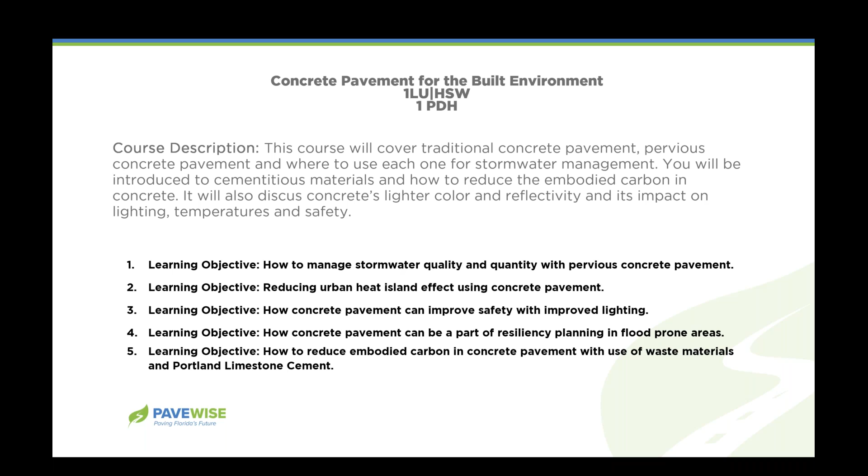We're going to be talking about managing stormwater, both quality and quantity, reducing urban heat islands. We're going to be talking about safety in lighting and how pavements play a role. We're going to be talking about resiliency and specifically how flooding impacts pavements. And then we're going to talk about reducing embodied carbon in concrete pavements. So it's a lot of different topics today, and we're tying them all into how concrete pavement affects people and planet when we're talking about the built environment.

So let's get started with managing stormwater. And in case my video doesn't work, I have a photo on here as well. But I think the easiest way to start talking about pervious concrete is to see a little video and watch how quickly the water can pass through this pavement.

I'm not sure if you can hear me while the video is running, and we'll just let this run for just a minute so you can see what's going on. Yes, Amy, yes, we can hear you. Okay, good. So this is coming out of the back of a ready-mix truck. That is a lot of water just disappearing into that pavement. So we're going to be talking about managing quantity and quality of stormwater.

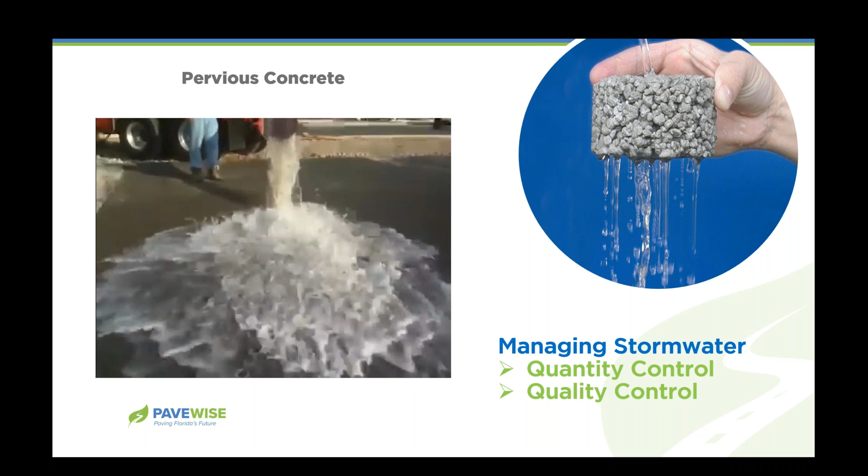Okay, so now you get the picture. It's a little easier to talk about what is pervious concrete. It is a no-fines concrete. It has about a 20% void space. It's missing the sand in the mix. So you just have your aggregates and your cement paste that are locking it together.

Depending on the mix and how it's placed, you can take 300 to 1,000 inches per hour. And in a heavy afternoon rainstorm, you're getting maybe an inch or two an hour. So really, the pavement layer is not your limiting factor. People are always worried about it getting clogged, but the pavement itself is really only part of the picture.

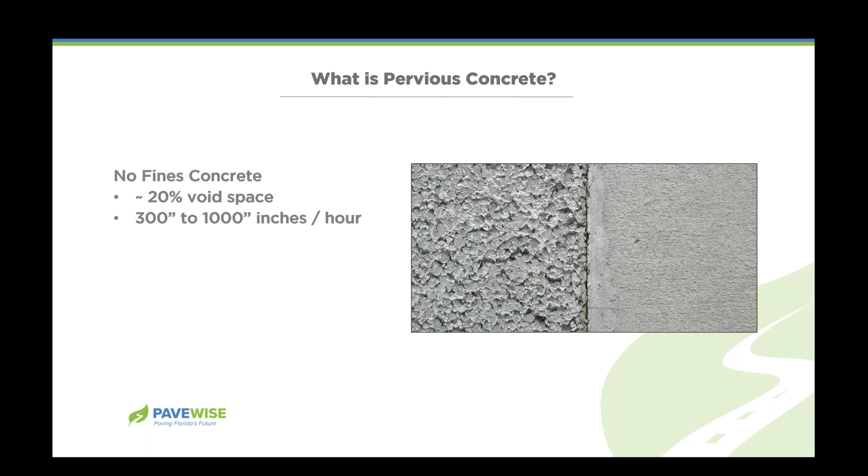Here you can see what it looks like, the texture - the traditional concrete on the right with a solid finish, and then the pervious concrete looking something like a Rice Krispie treat.

So it's one way that we can reduce the impacts of development. Here you see pre-development, where water can infiltrate through the soil and through grass, through the plants. And then when we develop a piece of property, we are really cutting off the way that water is getting back into the ground. So pervious concrete is one way that can really help us reduce the impacts of development.

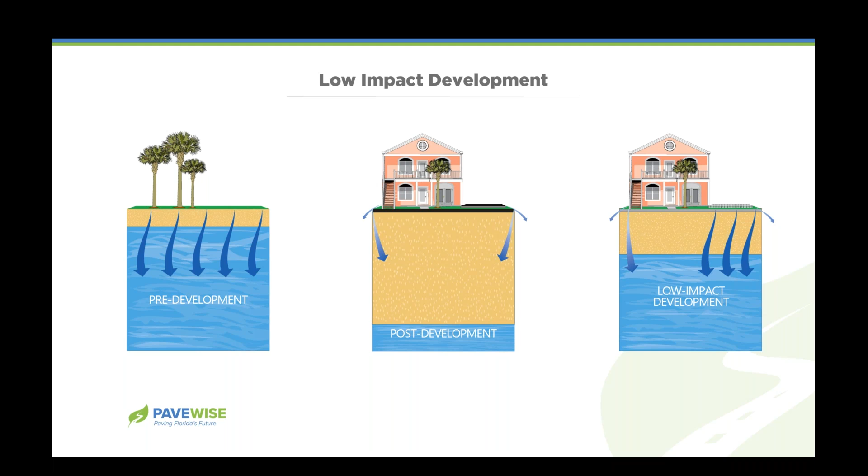And as we saw, the pervious concrete pavement layer, the water can go directly through that really fast, but it has to go somewhere. So what we need to understand is that pervious concrete is not just a pavement, but a stormwater management system. It's important to have an aggregate reservoir underneath the pervious concrete to hold that water and to give it time to infiltrate down into the ground.

A geotextile fabric layer goes between the soil and the aggregate reservoir to keep the soil from migrating up in there and giving you less void space in the future. And as you can see here, you can mix that pervious concrete with asphalt, with concrete, with other types of pavement.

And you want to make sure that you're going to have a barrier in between the other types of pavement and also the soil, because you could have washout underneath because that water is moving through so quickly.

One other thing to keep in mind is, as the water's infiltrating down into the soil, it still has to go somewhere. This is important in certain parts of Florida where we have really high water tables. So we recommend that you have 24 inches between the base of your reservoir layer and the water table. This helps it function and lets the water get back down into the soil.

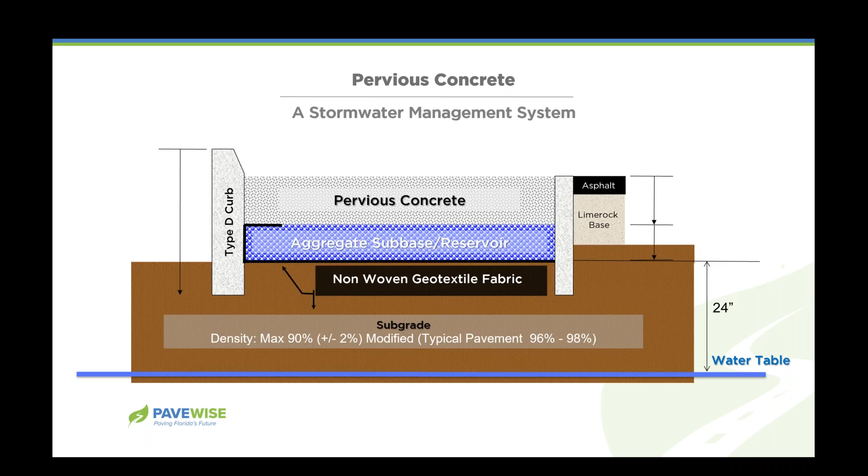So we can calculate it. The pervious, 6 inches of pervious concrete with 20% void space, you're going to have 1.2 inches of rainfall that can be held in that layer, and a 6-inch aggregate base with 40% void space is going to give you 2.4 inches, for a total capacity to hold 3.6 inches of rainfall.

Now we can extend that capacity by increasing the aggregate base layer. And then of course you have to calculate how quickly it will go into the soil. So we have some spreadsheets that can do this. It's really a pretty easy calculation.

So you can also add in rainfall that's coming into your pervious concrete from either traditional concrete or a roof area. So you can design your pervious concrete to store as much water as you need to for the conditions in that location.

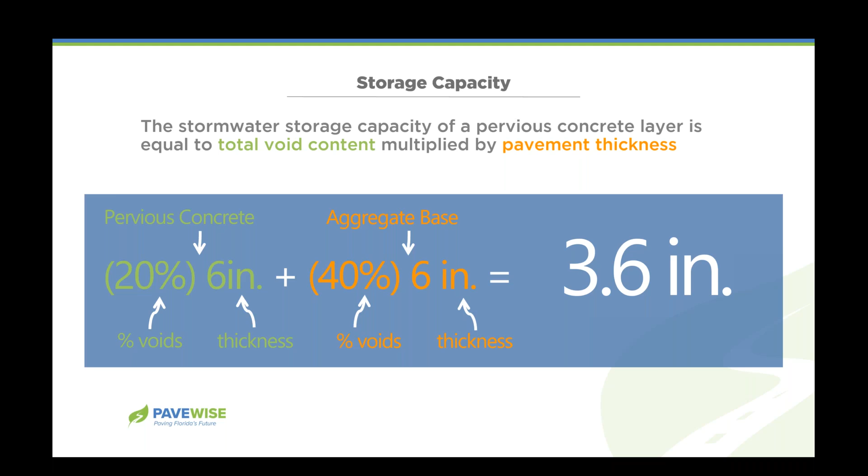Additionally, you can reuse the water in that reservoir to water landscaping. We don't see this a lot in Florida because we're not a water scarce region, but we do in other parts of the country. This is really important for them to be able to capture and reuse that water.

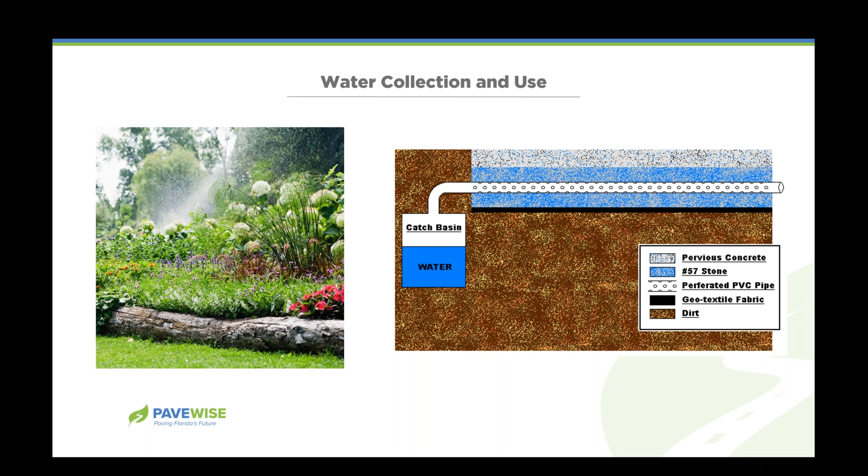So what is the effect on your vegetation? What's important here is not only is the water getting through to the vegetation in your landscaping, it's also air. Sometimes we see pavement that's been popped up by roots, and those roots have been suffocated and they're trying to get up and get air. So the pervious concrete is going to let water and air down into the roots and help your trees be healthy.

And also in a parking lot, you're able to pave within the drip line where you wouldn't be able to with an impervious surface.

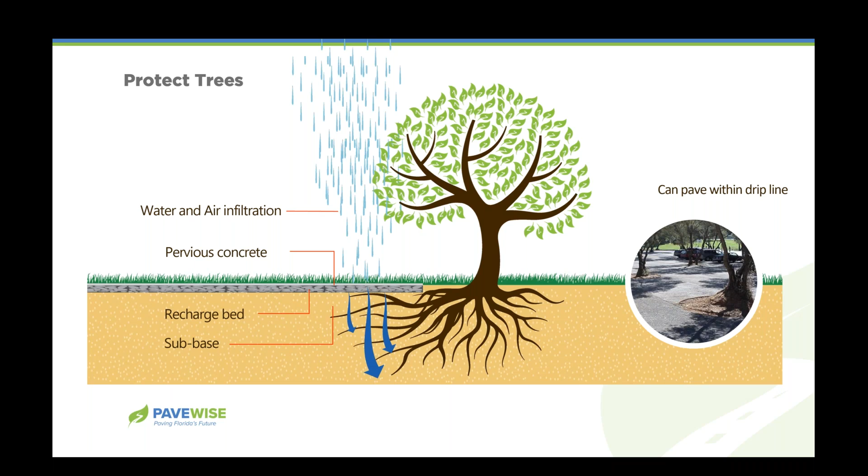Also, there's a requirement for that first inch of rainfall to be captured and cleaned, and pervious concrete does fulfill those requirements. It's a best management practice for capturing anything dripping out of your vehicle or anything that gets spilled on a pavement. It's cleaned in a couple of different ways: there's actually some algae or bacteria growth that happens in the void space, and that cleans the contaminants, as well as when it's getting into the soil, it gets broken down by the soil microbes.

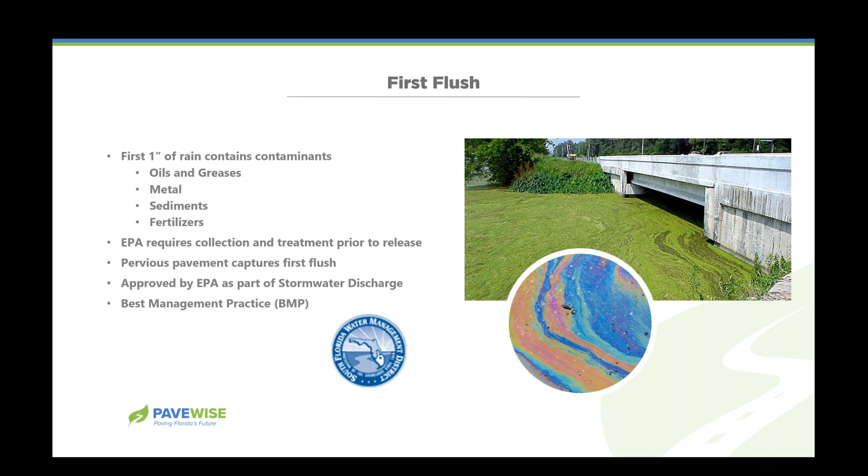So we've talked about recharging the groundwater, conserving our water resources, helping the vegetation that's surrounding our built environment, and cleaning the runoff. It's also a cooler surface, both due to the light color of the concrete, but also to the moisture that's in the pavement, and when that evaporates, it has a cooling effect. So there's a lot of environmental benefits when we're talking about pervious concrete.

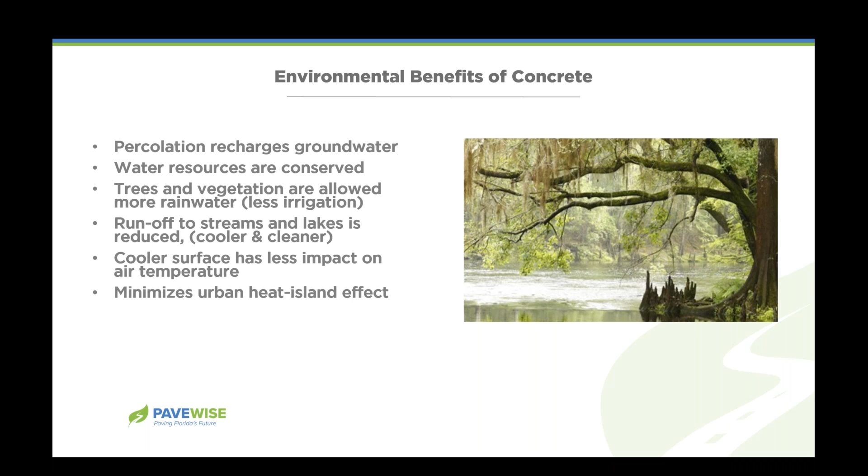However, there's also economic benefits. In places where land is cheap, we can buy more land and put in a retention pond. We know that locations with inexpensive land are getting fewer, and our land costs are going up. So why not put that retention pond underneath of our parking lots and have more space on the lot to develop? So land cost is important, and also you're eliminating the infrastructure that's channeling the water into the retention pond.

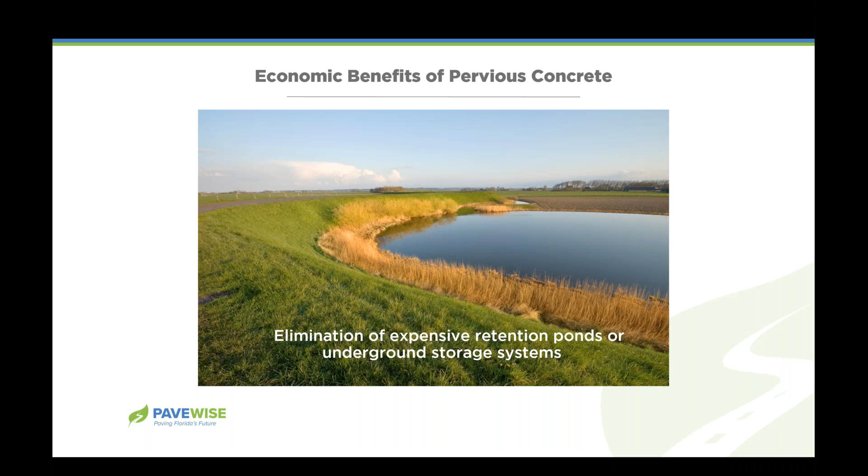So great, that's some cool stuff. Now, where do we use it? Again, parking lots are really the ideal place to put pervious concrete. But you can also put it in driveways, sidewalks, residential streets, and it's a great product for roadway base as well as shoulders of the roadway to keep the runoff from going into an adjacent stream.

Now, it isn't an application that you're going to use everywhere. It shouldn't be used for airports, runways, etc., basketball courts—we're going to talk about ball courts a little more—industrial facilities, gas stations, and again, areas with a high water table, you're going to lose the benefits of that water management.

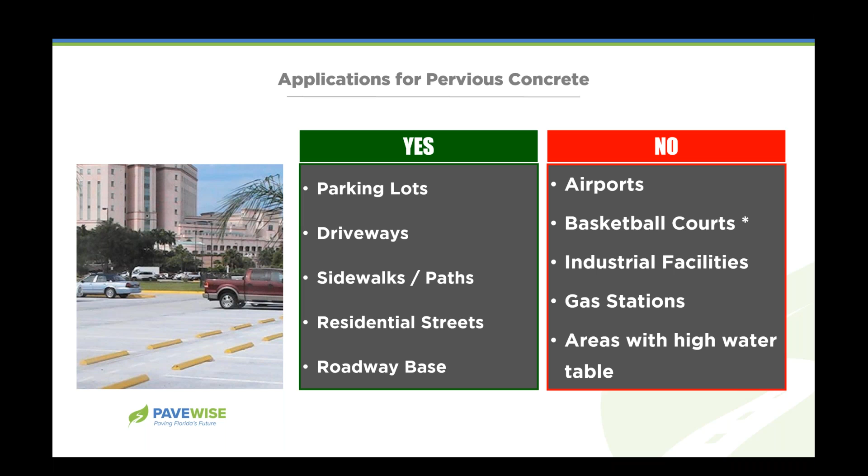I like this example of a parking lot, and here they have chosen to mix both traditional concrete and pervious concrete. They've designed it so that the reservoir is capturing the runoff from the impervious surface as well. You can also see that they have put in some swales that in an extreme event would capture the additional runoff. And as we just saw recently, we do have some extreme events with exceptional rainfall.

Driveways—we're building on smaller and smaller lots with bigger and bigger houses. There are some municipalities that are taxing impervious surfaces, or they're simply not allowed; you have to keep a certain percent of your property as pervious. So a pervious driveway can really help in some of those situations.

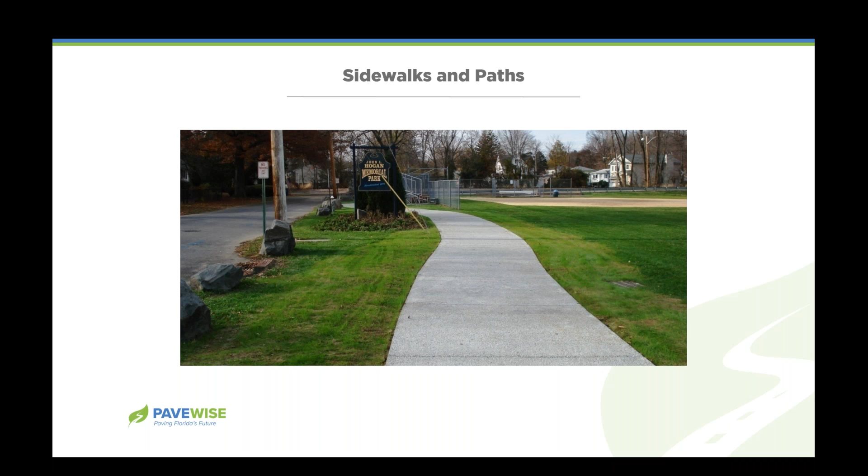Sidewalks—pervious concrete is ADA compliant, so you can use it in sidewalks. The smaller the aggregate that you use in the mix, the smoother the surface. So for an application such as a road base, you're probably going to want to use a larger aggregate because the drainage is most important, whereas for a sidewalk, you're going to want to use a smaller aggregate to have the smoothest surface possible.

Streets and alleyways, residential streets—there are a few developments where the homeowners really want to be as environmentally friendly as they possibly can, and this is one way to help reduce the impact of that new development.

Again, pervious concrete, while it is a robust material, does not have the same strength that you would need for an industrial facility, especially something like a port, where you could have vehicles even heavier than what you would find on the roadway. So this is not a product for an industrial facility.

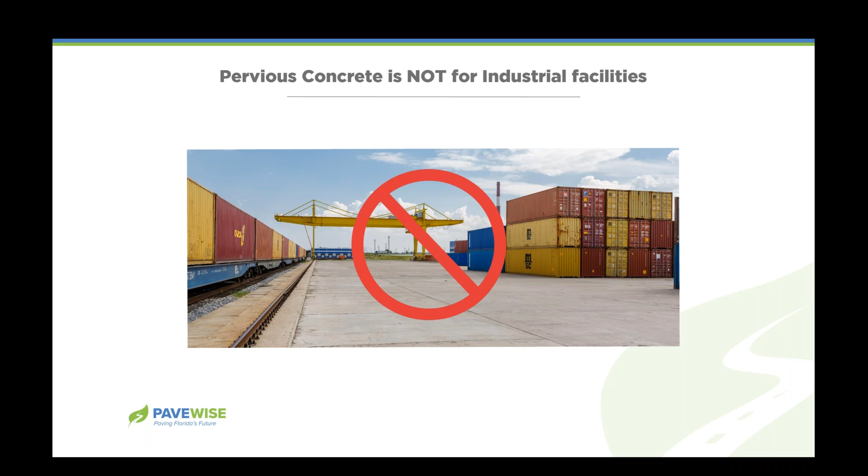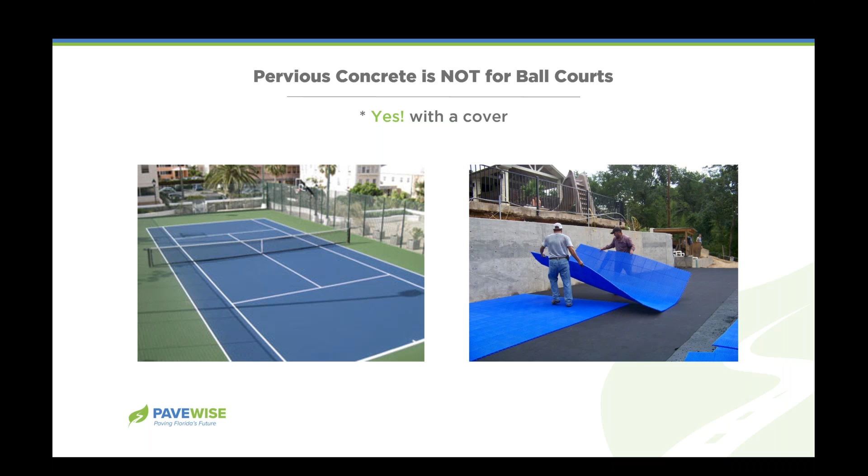Now, I have an asterisk here because concrete is not for ball courts, but they make a great base for a court. You've seen after a tennis match that has a downpour and they're out there squeegeeing off the court so they can complete the match. If you have pervious concrete as the base of your ball court, following our afternoon thunderstorms, you're able to get right back out there on a dry court, and they make some covers that go on top with nice colors and lines. I've seen a few of these projects recently, and people are really happy to have that dry ball court.

Okay, so we've talked about how to manage stormwater, both quantity and quality, and we're going to switch gears now to talk about safety.

What we know is that no one really likes to park out in the back dark corner of a parking lot and go into a store. Where do we park? We park underneath the light. The lighter color of concrete is reflective and will help distribute the light more broadly throughout the parking lot. This has been shown to not only reduce accidents, but also crime. There even was one study that showed an increase in shopping because people were more comfortable being there at night. I don't know about that, but we do know that it does improve the lighting in the parking lot.

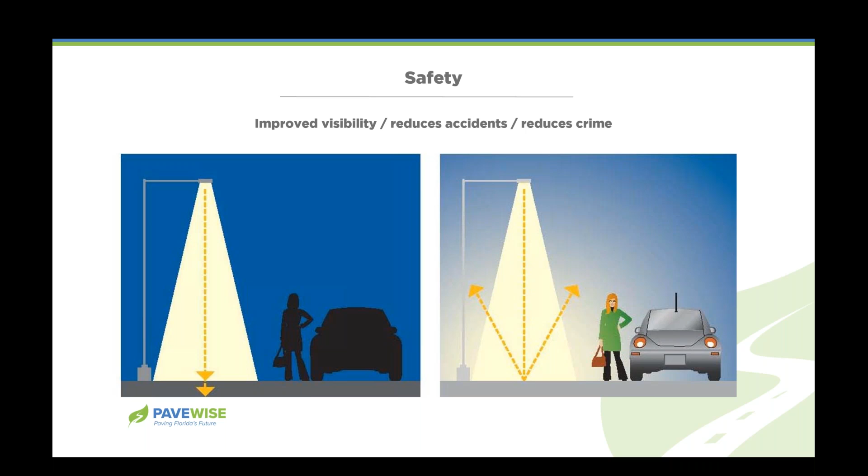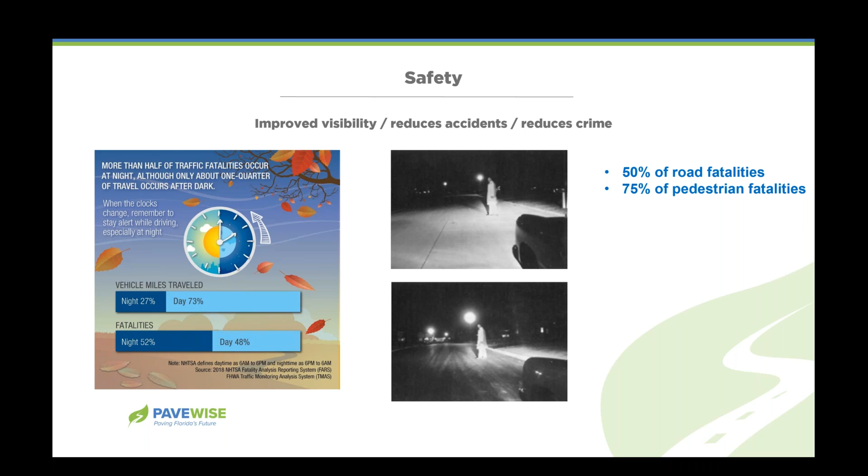We also know that about half of the road fatalities occur at night, even though only 27% of the driving is done at night. Also, 75% of pedestrian fatalities occur at night. So you can combine better lighting with the reflectivity off the roadway to make sure that you can have better visibility in driving at night.

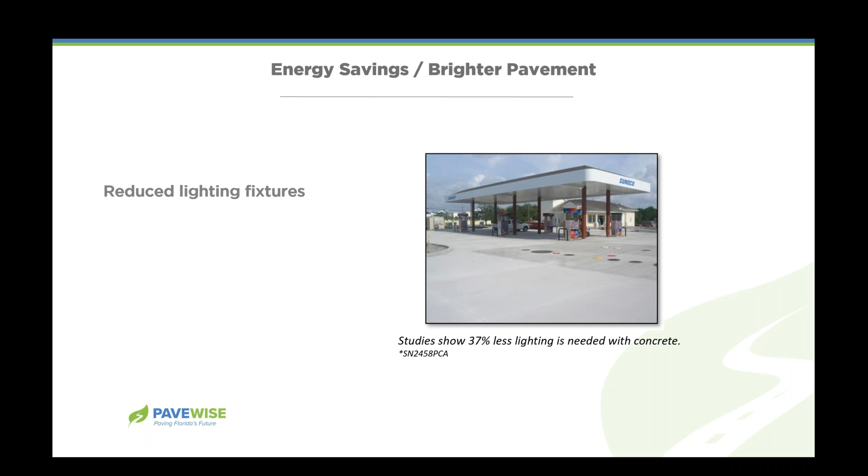You can reduce your light fixtures, so you have some savings in the structure. Now, lighting has come a long way, so I don't know about the percentages anymore, but we do know that reflectivity is there. We're going to continue talking about reflectivity and urban heat islands.

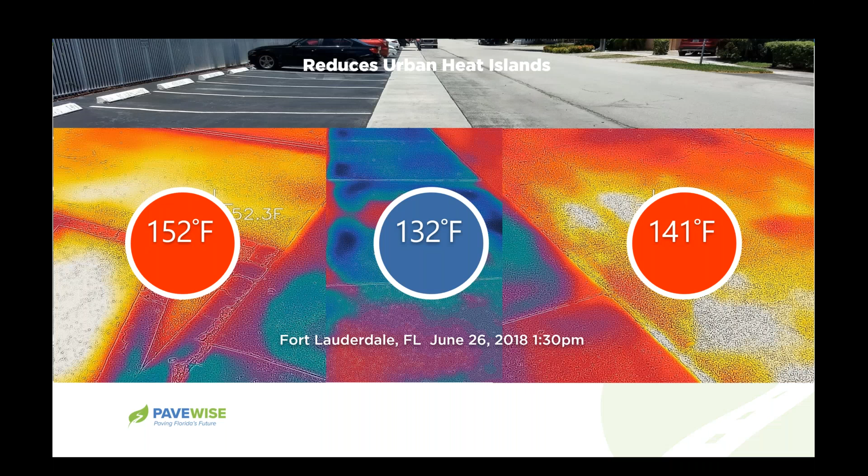I took this picture in Fort Lauderdale in June, in the middle of the day. You can see here that the concrete sidewalk was coming in at 132 degrees, the aged asphalt that lightens up with age is 141 degrees, and the newly resurfaced parking stalls is 152 degrees. So 10 to 20 degrees difference between your concrete and your asphalt.

The Concrete Sustainability Hub at MIT just published a study, I think it was last week, where they're talking about reflective pavements. It's not as straightforward as just the change in temperature of the pavement, because this reflection also reflects light to the surrounding buildings and can actually heat them up. So you have to look at the context and make sure you're either providing vegetation in the right places or that it's not reflecting onto a building.

So urban heat island effects, I found, can be great up north in the wintertime. I had a colleague come in late to work and he said his car door was frozen shut and he couldn't open it. I kind of laughed because I lived in the city and I didn't even have frost on my car. That's when I really understood urban heat islands.

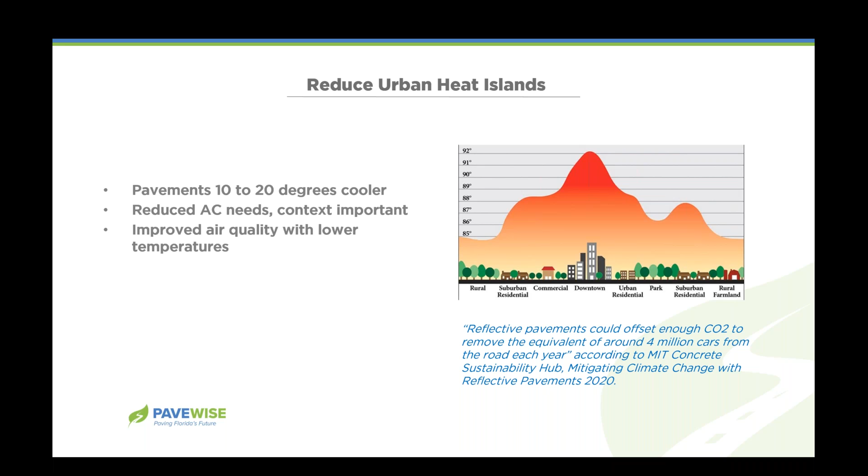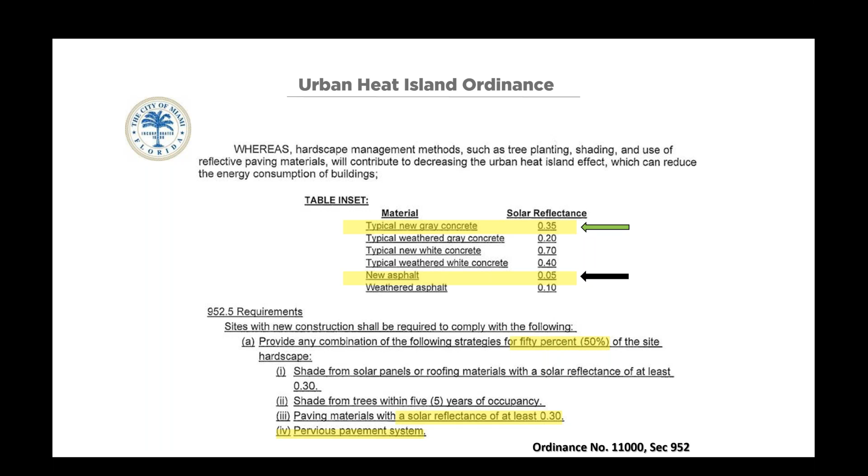So this is something to think about when we're looking at pavements and surrounding buildings, and how can we keep from having heat waves and help reduce those incidents. Now, some cities actually have urban heat island ordinances. City of Miami is one of them. Now, the best way, of course, to address urban heat islands is through vegetation and trees, but we can't put them everywhere. So a combination of putting trees where you can to shade as much as possible, and then also lightening your pavement, the combined effect will give you your best results.

Okay, and now we're going to talk about resiliency. Make sure we're all right on time. Okay.

Resiliency is pretty broad, and there are different types of incidences, not just flooding, but fire and wind. So today we don't need to address resiliency in terms of buildings and operations, so we're really limiting today's discussion. We're going to talk about pavement resiliency in terms of flooding, because this is something that is a big impact here in Florida, where we have both sunny day flooding and high tides that actually come up above the street level. And then we also have rainfall events.

So recently with Eta, we had up to 24 inches of rain in some places. So we have water coming up and water coming down. And what's even worse, and we saw this in Eta in some places, is when you have both at the same time. We had some high tide events at the same time we were having extremely heavy rainfall events, and the water had nowhere to go. So it really exacerbated the situation.

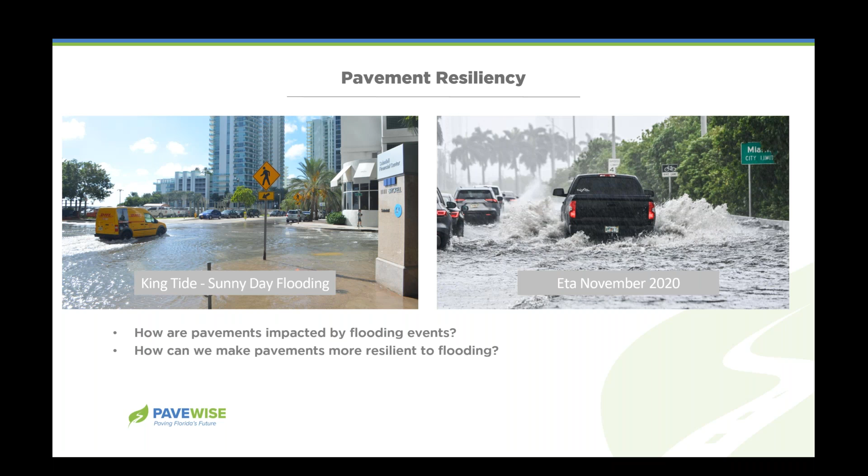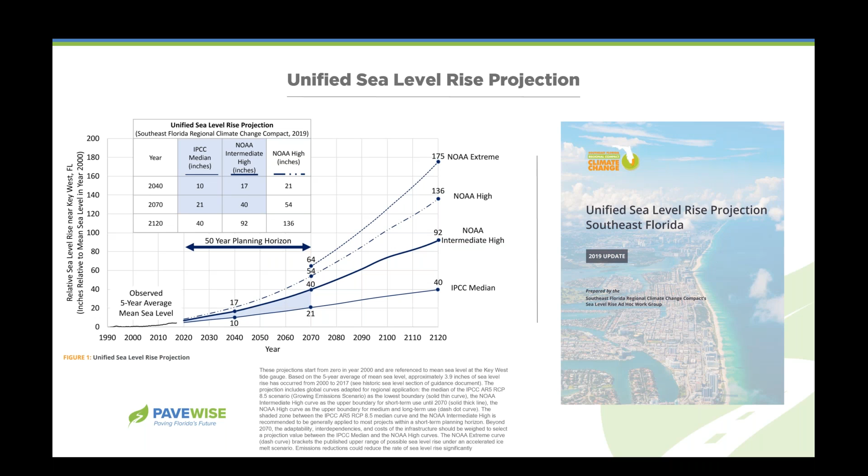So when you're building a road, you're usually designing for a 20-year lifespan. Most roads last much longer than that. The 20 years is where you're going to have to do some rehabilitation or maintenance. And here, looking 20 years from now, in 2040, we're probably going to see somewhere in the range of 10 to 17 inches of sea level rise. So we need to make sure we're planning for those increased flooding events depending on the location of the project.

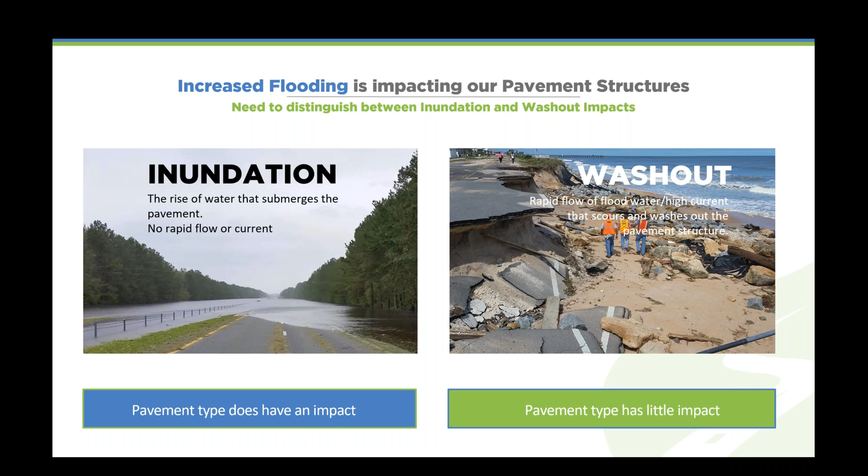Now, I want to clarify here, when we're talking about a flooding event, we're talking about an inundation. So pavement types can play a role in an inundation event. Now, when you have a washout type of flooding, it doesn't really matter what your pavement type is, you're going to have a road failure, and you can address that in other ways, in the road base, in the environment surrounding the roadway, to address the washout. So we're talking about an inundation event.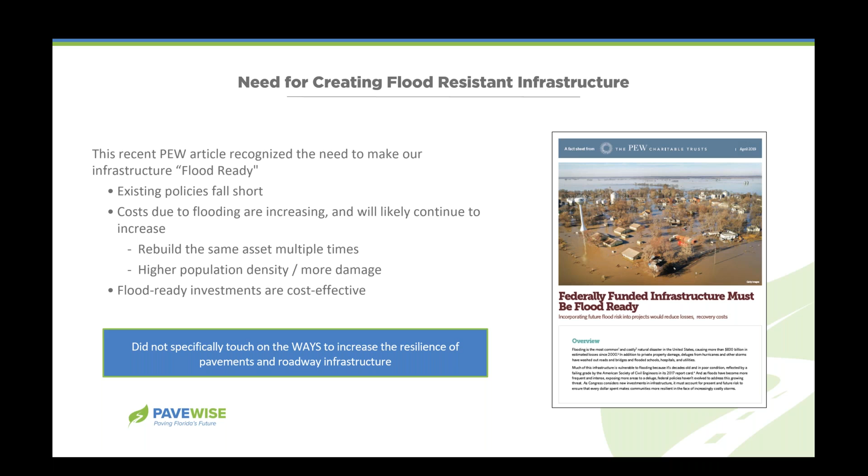We also are seeing increased calls for resilient infrastructure. They haven't defined exactly what they mean by that, but what we know is that we need to prepare, and that we are likely going to see more funding tied to making sure that resiliency is taken into account.

So what do we mean by pavement resiliency? Resiliency is the ability to resist, absorb, accommodate, and recover from an event in a timely manner. So what happens to the performance of the pavement? How long does it take to recover? And what are the impacts to the pavement during that weakened condition?

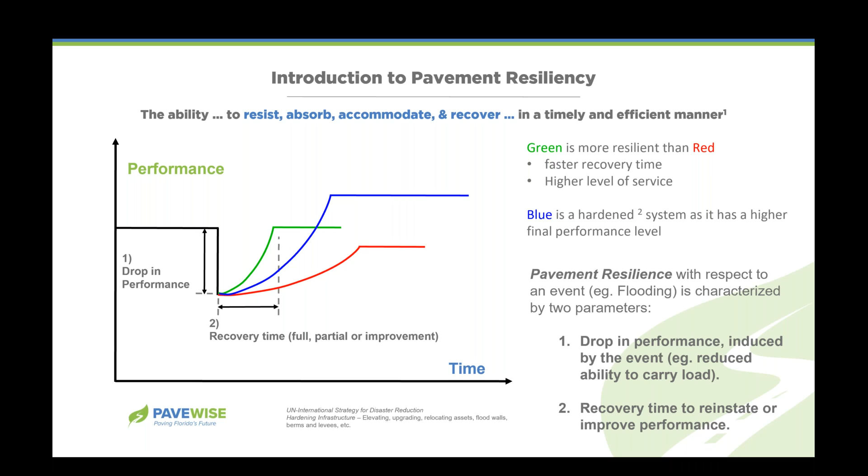So we're going to go back a little bit to the fundamentals of how flexible pavement functions and a rigid pavement functions. In flexible pavement, that load is also reflected down into the base layers of that pavement structure, and they're important to carrying that load. You need to make sure that all the layers are to their design strengths to not have damage to your top pavement layer.

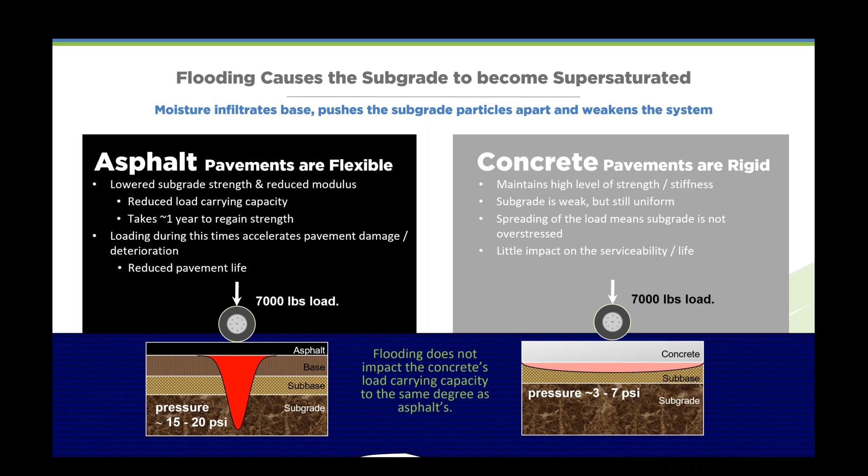And in a rigid pavement, it's less dependent on the base and the subgrade. It's more important that it has a uniform strength, because the weight of that load is carried across the slab. So here we can begin to see why it might be important that in a flooding event, those base layers

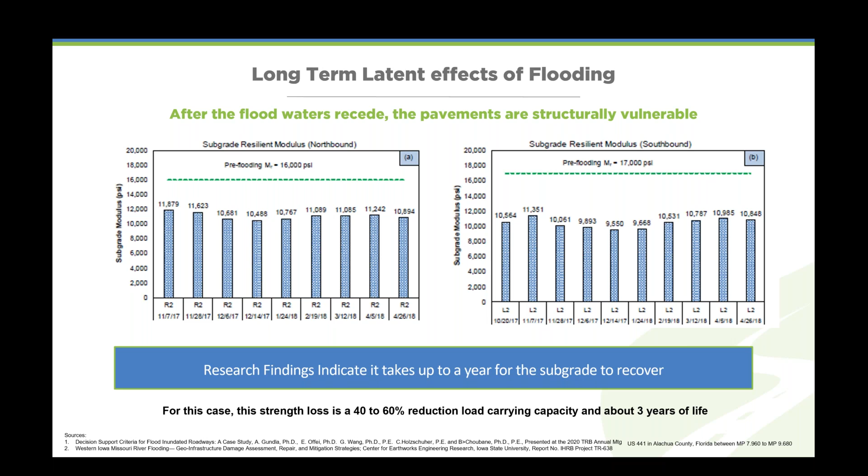And it took up to a year. We see the water recede off the pavement within a day or two, but it hasn't really recovered from the flooding event. And so these roads, as they continue to take traffic, it's reducing the ultimate lifespan of these roads, because they have the reduced load carrying capacity.

So ideally, we would like to stay off the pavements until they dry out, but obviously that's not possible. So we're going to have primary impacts, which is during the flooding event, and then secondary impacts that can happen up to a year later, where you're having loaded pavements while they're still in that weakened condition.

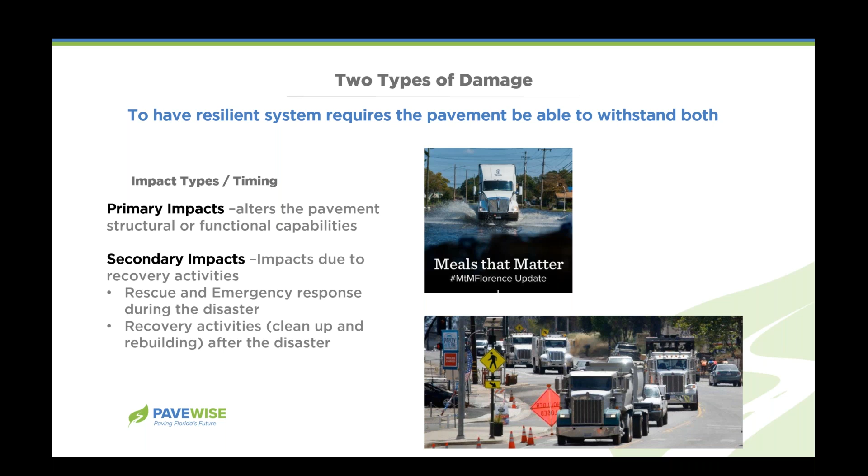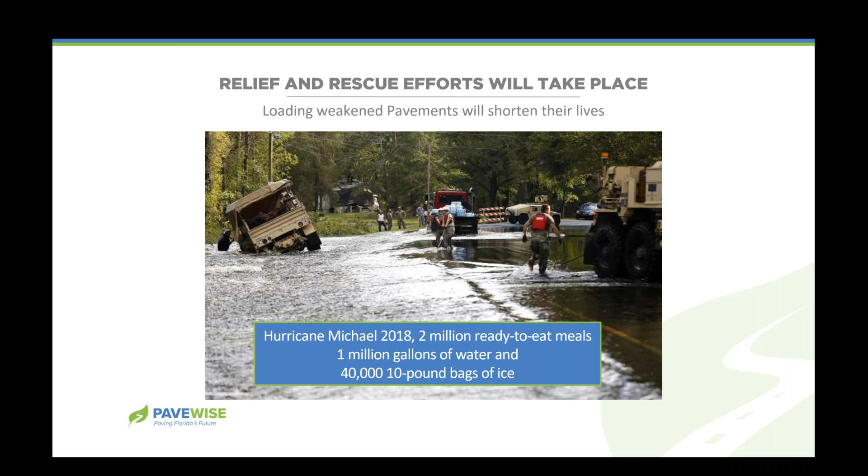So we know we're going to bring in meals and water and rescue people, and sometimes these are even while the roadways are still flooded. We're also going to have debris removal. A dump truck capacity is around 10 to 17 cubic yards of material, and 1 million cubic yards of debris is equal to about 65,000 dump trucks.

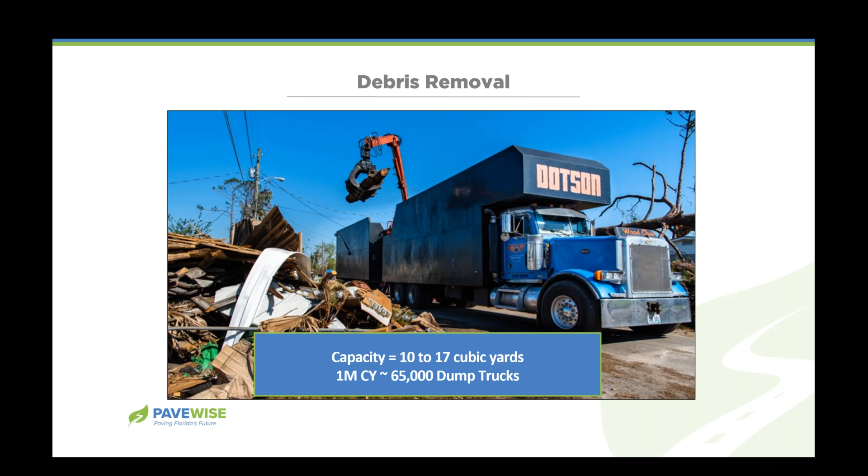So you can imagine that here in Mexico Beach, this road was designed for typical traffic of a small town, not necessarily designed to have several hundred thousand additional heavy vehicles on it to remove all of this debris. And that doesn't even count the additional trucks that's going to come in for the reconstruction.

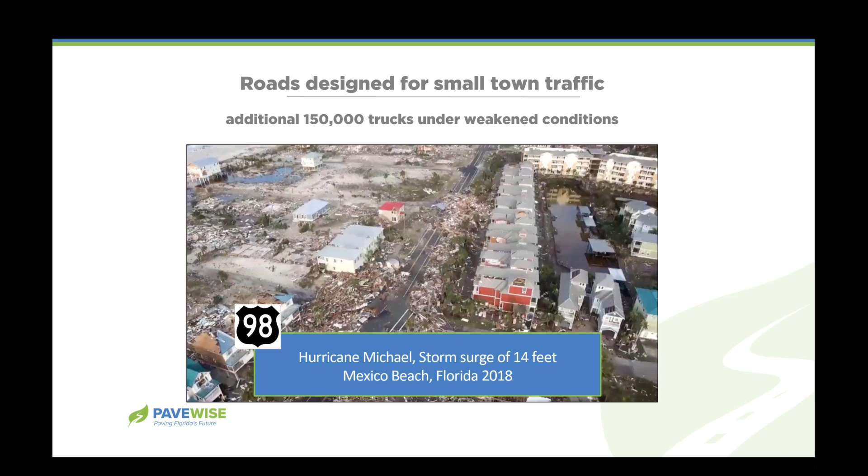Hurricane Irma, we had 4 million cubic yards in Miami-Dade, 3 million cubic yards of debris in Palm Beach. So these are just a few examples, and I imagine most people on the call are from Florida, and you may have unfortunately experienced some of this yourself. So I'm not going to go through too much more examples, just to understand that these local roads were not necessarily designed for heavy trucks and also in a weakened condition.

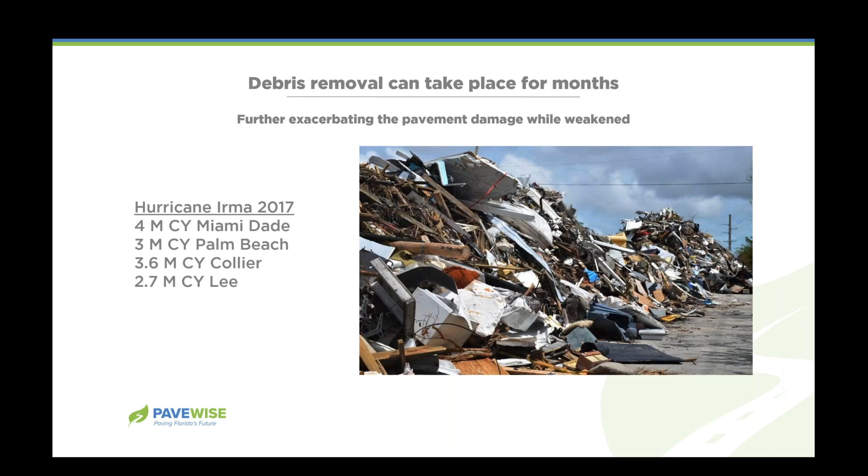Now, the Department of Transportation in Louisiana did a study following Katrina, and they took some satellite photos because they didn't have any pre-event values for their subgrade and their pavements. They did some evaluation of where their pavements were flooded and where they had not been flooded, and they took samples from both their asphalt pavements and their concrete pavements. They did find some significant damage to their asphalt pavements, and they had to rehabilitate about 200 miles of submerged roadways for about $50 million.

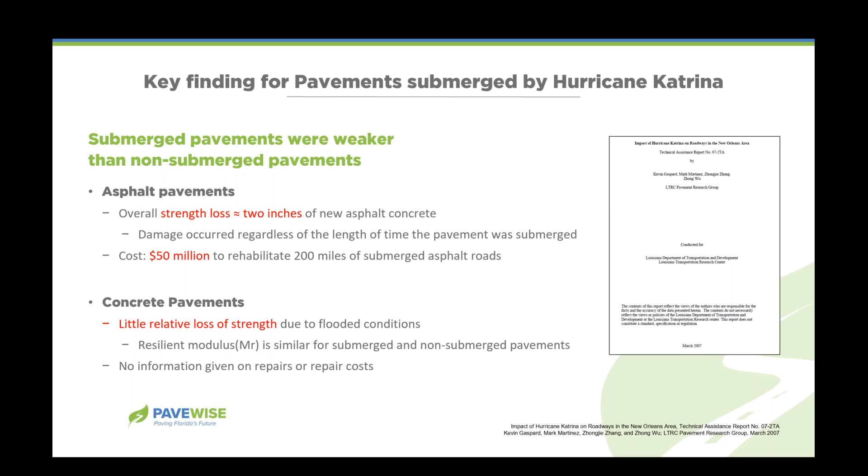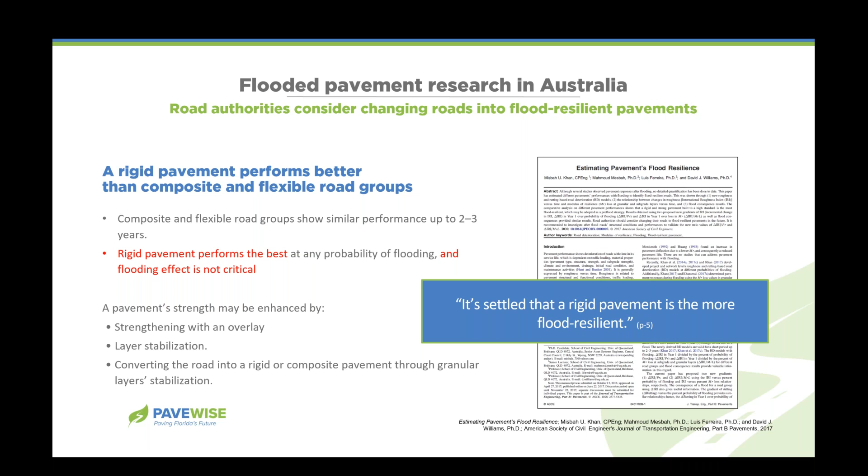And their concrete pavements really didn't see any strength loss, and they didn't have to do repairs. Australia has also had quite a few major flooding events and has researched their pavements, and also found rigid pavement is the more flood resilient pavement. And they have gone ahead and changed their design criteria so that they are now looking at designing roads with a weakened subgrade. Then they're prepared for that flooding event, and the pavement will withstand it regardless of what the type of pavement they put down.

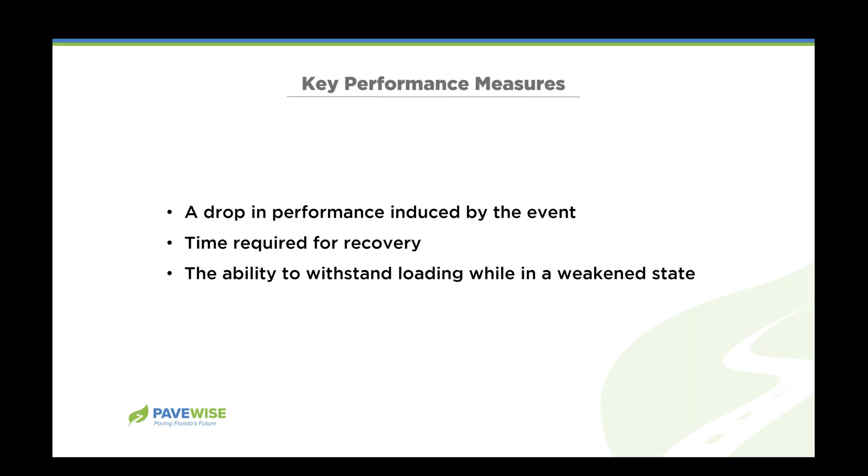So what's our key performance measures? What is the drop in performance? How quickly does it recover? And can it withstand loading in a weakened state? So we have found that the concrete will still perform with a weakened subgrade, and it will be quicker to recover, and it's less impacted by those secondary events.

So we like to say stiffer pavements, because there's different ways that you can address resilient pavements. You can stiffen the subgrade, you can use stabilized base, and you can use a stiffer pavement layer. And so we know concrete is one way to do that, but we want to say stiffer pavements are going to be more resilient to flooding.

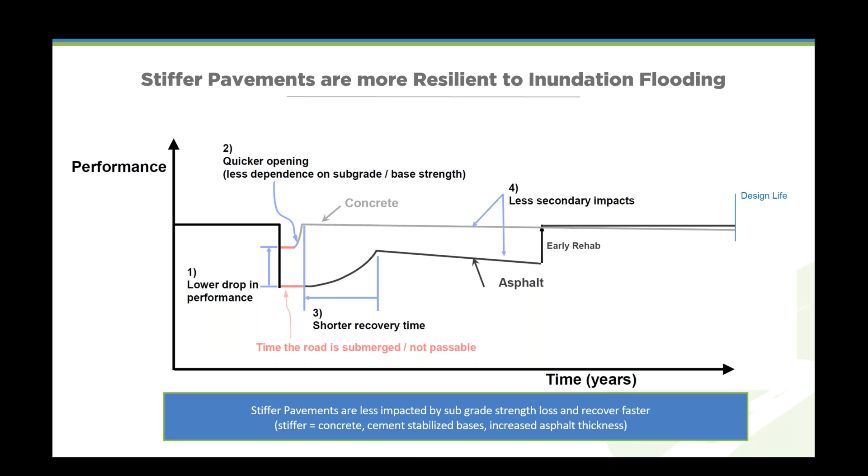Let's check my time here. We're doing good.

So if we're going to use concrete pavement, we would like to make that concrete as green as possible. So how do we reduce the embodied carbon in our concrete?

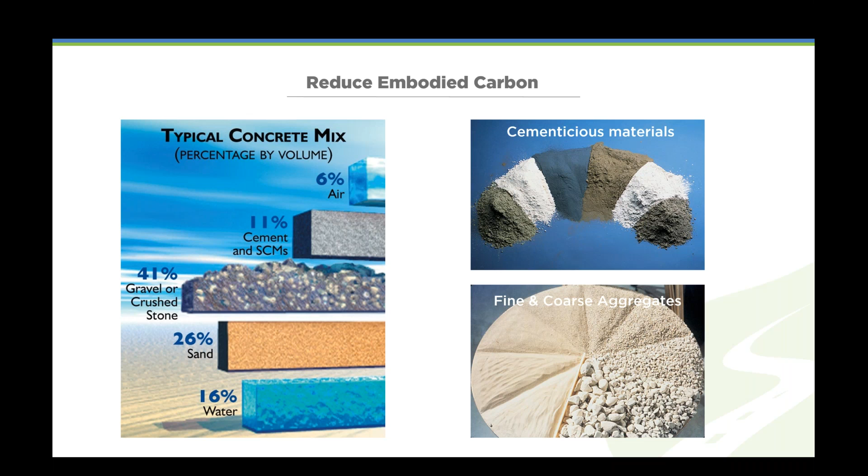We're going to focus on the cementitious materials, because that is where 88% of the carbon emissions in concrete are coming from.

Now maybe you have heard of slag cement or fly ash, and you're saying wait a minute, they reduce CO2 even more than that. Well yes, they do, but they are not able to completely replace the Portland cement, and in some cases they're not always readily available. So you're limited by the availability of slag and fly ash, as well as how much Portland cement can be replaced.

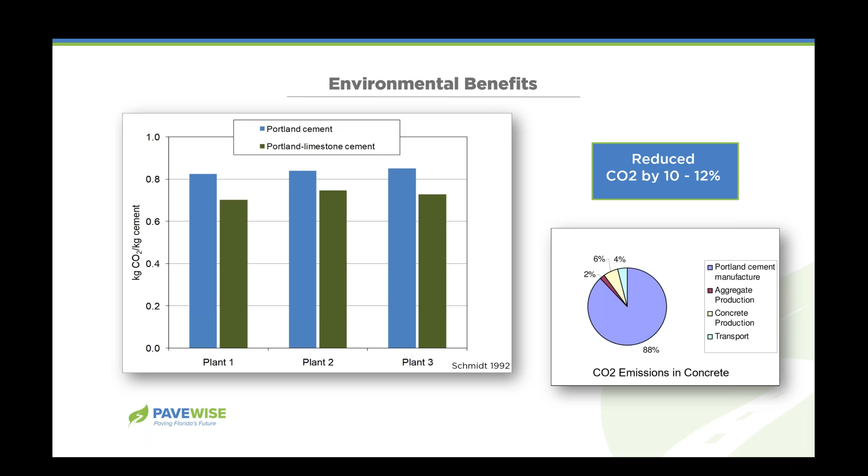What's interesting about Portland limestone cement is it can 100% replace the Portland cement. So what is Portland limestone cement? Traditional Portland cement already has about 5% limestone interground with the clinker. We're not going to go into cement production today, so just bear with me here.

With Portland limestone cement, you can replace up to 15%, and this is where your 10 to 12% lower CO2 emissions come from. Portland limestone cement is ground a little bit finer, so it has slightly different properties, but it's very close to the same product and performs in a manner where you can replace 100% of your traditional Portland cement with the Portland limestone cement.

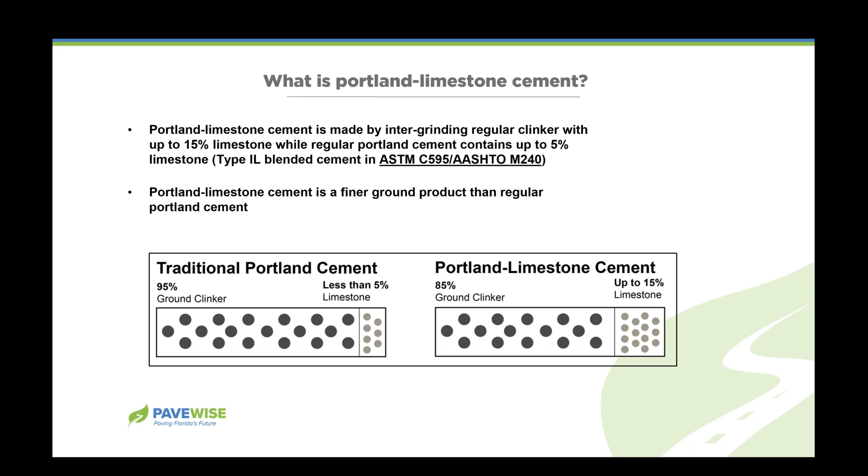In Europe, this has been used for 50 some years. Their Portland limestone cement is their cement—they don't have the 5% that we have here. And they have different blends that go up to 35% limestone. Of course, those are not for all applications, and here we've gone with a limit where it can really replace the traditional Portland cement.

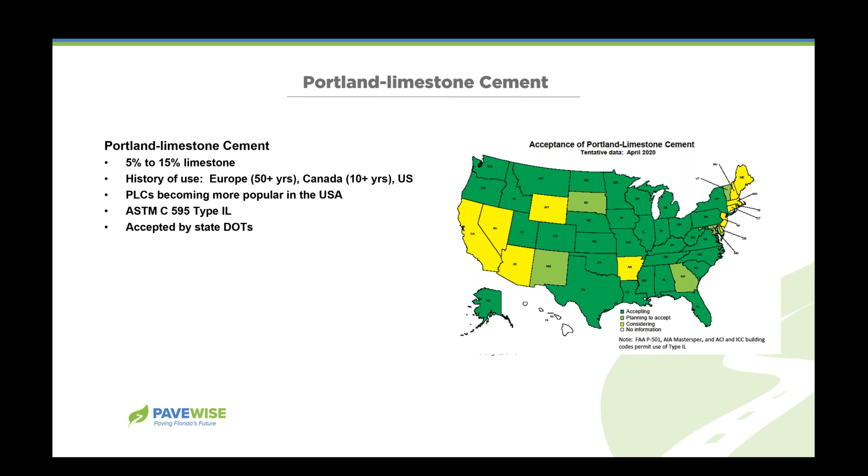We also see that it's being accepted across the United States by DOTs and being used everywhere, including here in Florida. We can anticipate that it will gradually be replacing traditional Portland cement.

Again, it has slightly different properties, and it has equivalent strength to our traditional Portland cement. Importantly, it works well with supplementary cementitious materials like slag and fly ash. Here we can see some of the qualities in helping with workability and bleeding, and a little increase with heat of hydration, which we can address with the slag and the fly ash.

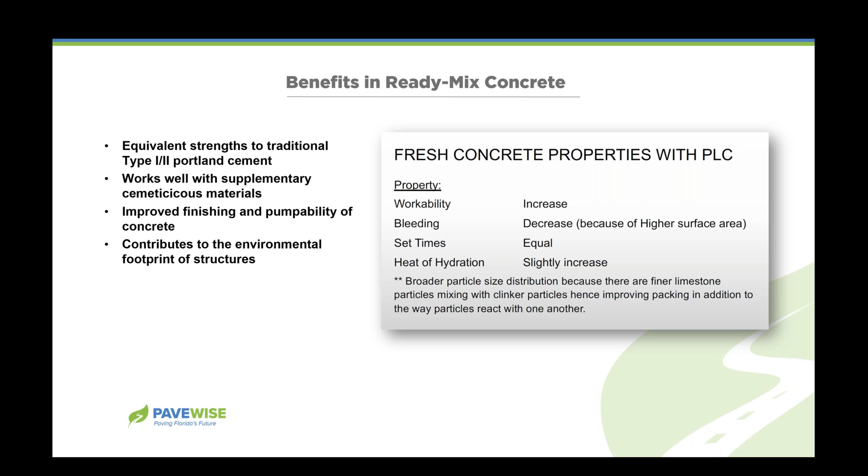Here we can see there's synergies between the Portland limestone cement and slag and fly ash. You can see the different mix designs—if you replace the ordinary Portland with the Portland limestone cement, you would be able to reduce all of these even more. Each one of these different types of mixes is going to come down by maybe another 10%.

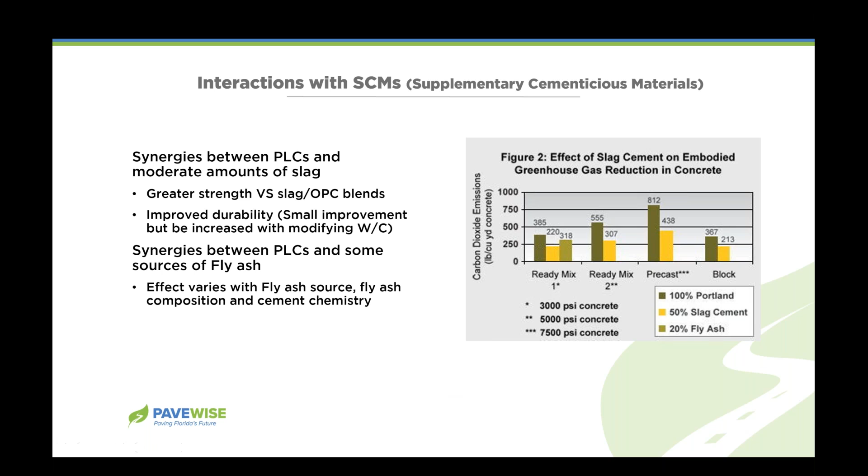Like I said, we are using it here in Florida, and you likely have it on some of your projects. This is the Bay Shore condominiums in Tampa, 18,000 cubic yards, where they had post-tension slabs that were 100% replaced with the limestone cement. Then for their shear walls and columns, they had 50% Portland limestone cement and 50% slag mix.

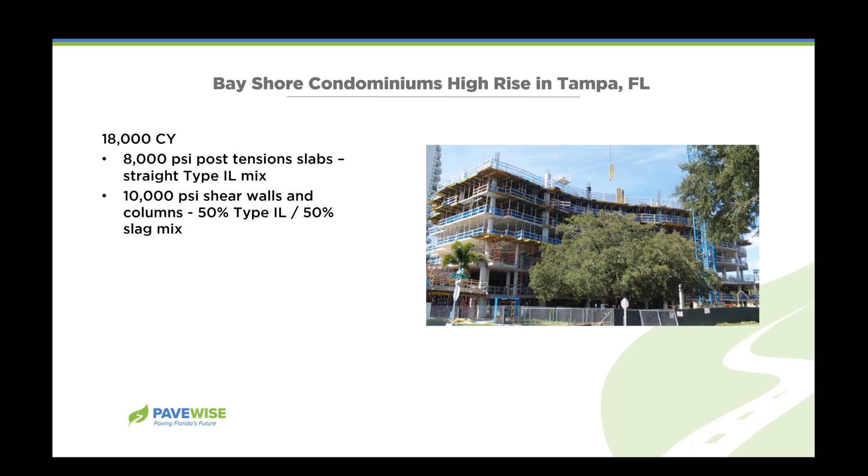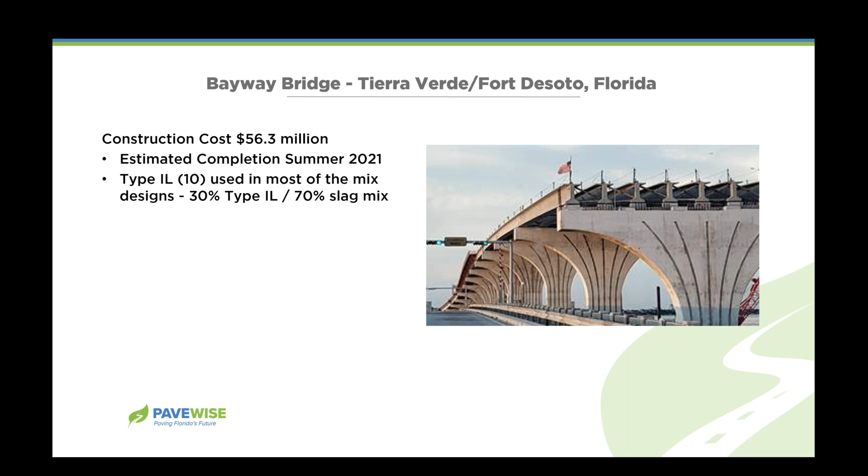The Fort DeSoto Bayway Bridge used Type IL cement, representing up to 15% limestone. In this case, this particular cement had 10% limestone in the mix, and they used 30% Portland limestone cement and 70% slag mix for the mass pours here to keep the heat of hydration down.

Now, for those of you that work on LEED projects, all the different topics we've talked about today are going to help in your sustainable sites. Your pervious concrete is going to help with your rainwater management, your heat island reduction, as well as you can use it for outdoor water use reduction.

Traditional concrete or pervious is going to help with your heat island reduction. And then in materials and resources, we can use the lowered embodied energy, contributing to your life cycle impact reduction. I also want to make sure you know there are environmental product declarations from the industry, both for cement and concrete.

There's industry average EPDs as well as company specific ones. And there's also sourcing of raw materials. There's a certificate for sustainably sourced concrete, as well as it being a local material, and your slag and fly ash are going to be recycled materials.

The EPD database for the industry can be found on NRMCA, the National Ready Mix Concrete Association's website. Both producer EPDs as well as industry EPDs, and these are third-party verified.

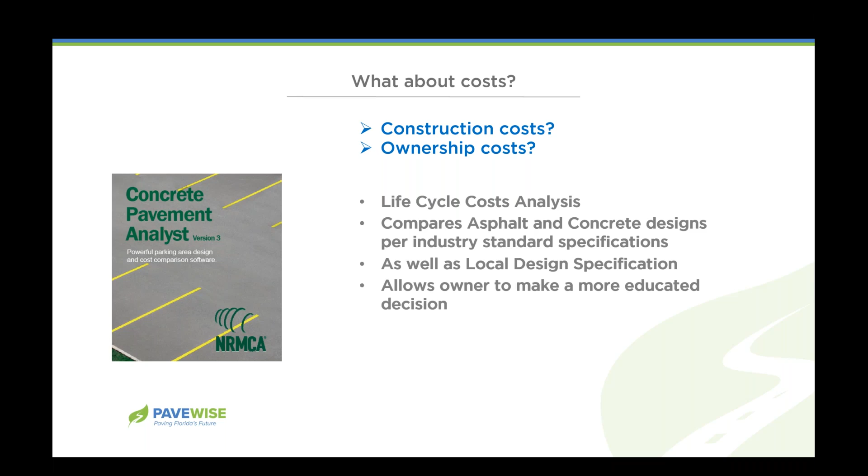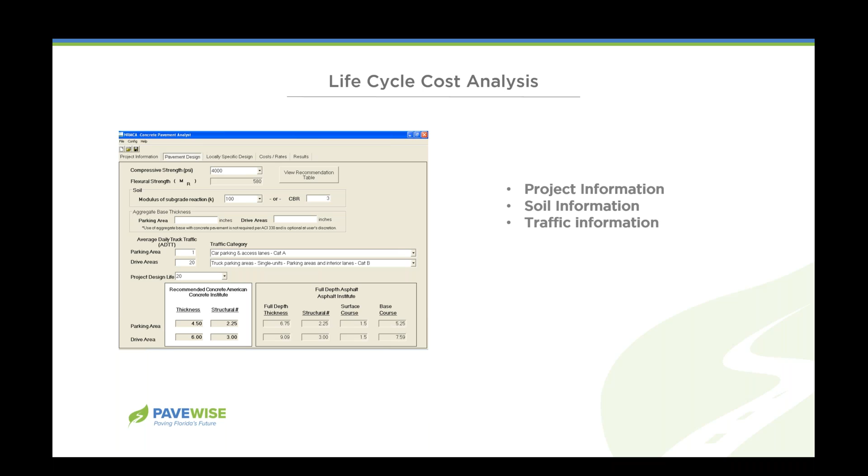So we can help you analyze this. There's some software to give you a quick look and compare asphalt and concrete. There are several different types of software out there to help you do this; this is just one of them. You need some basic information about your project—you need to understand the soil conditions, and you need to know the traffic for the type of project you're working on. Then it will give you some preliminary design options with the cost associated with those.

This first graph here is in inches, and this is a parking lot example. Your concrete has a structural number of 2.25. This is important because often when we're comparing costs, we're looking at construction costs and not comparing structurally equivalent options.

Additionally, what we don't always think about when funding a project is the maintenance cost. Depending on the type of project and the owner, this may or may not be important to them. I foresee a project like schools—they never have enough budget, and if we could keep that maintenance cost down for our local municipalities, then they're going to be able to use that budget for other things.

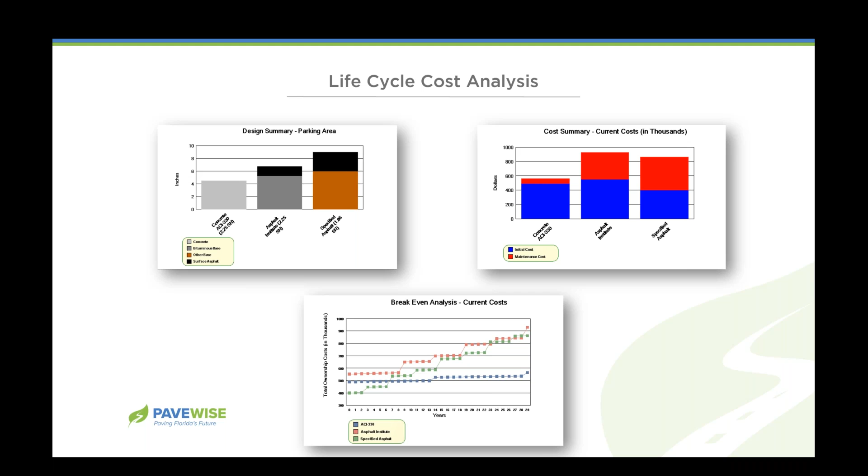So yes, it's possible, not always, but often concrete is going to have a little bit higher construction cost. But if you're looking at being the owner of this, the whole life of that pavement is important to you. Here you can see this blue line is your concrete cost, which needs a little bit of maintenance. Your green and red lines are the two different options for asphalt, where you see you're going to have to do some regular maintenance to that pavement. So this is just helping the owner understand his choices and the costs associated with those choices.

Florida Concrete and Products Association can help you with design, whether you're working on a parking lot, a roadway, a roundabout, or any type of concrete pavement. We have experts in parking lots, roadways, local roads, residential streets, and highways. We can also help with questions about joint layout, or whether you need dowel bars.

You can submit to pavewise.com, say hey, I've got a project coming up and I want some more information, and we will be there to help you. The industry offers this free design assistance, whether you need a lot of help, a little help, or just have some questions.